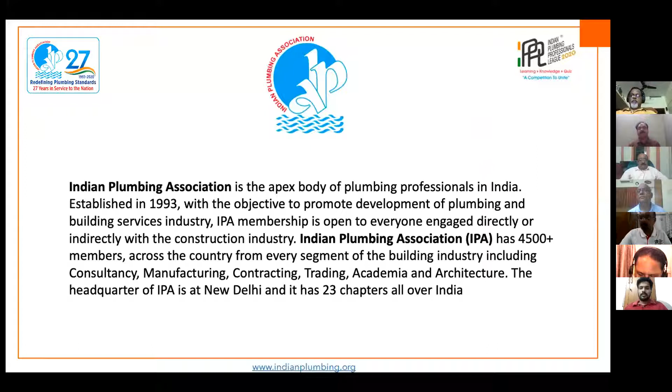The mission of Indian Plumbing Association is the following: redefining plumbing standards in India, striving for an overall improvement of the plumbing profession in India at par with international standards, and active participation with the global body in the plumbing profession.

The objectives of Indian Plumbing Association are to adopt correct professional practices, adhere to ethical codes of conduct, aim for the highest standards of workmanship, promote and foster healthy relationships within the fraternity, and to promote advancement of plumbing services in the country by organizing seminars, exhibitions, and symposiums to educate members of the trade and the general public. This includes providing a platform for dissemination of information and exchange of ideas on matters related to the plumbing profession, establishing harmonious means of communication to facilitate better interface between the plumbing community, government, quasi-government agencies, statutory bodies, NGOs, and private agencies, and establishing training and education programs to create plumbing professionals.

Now I will go on to IPPL, the Indian Plumbing Professionals League. This is a competition organized by Indian Plumbing Association to create awareness on plumbing standards. It was started in 2017, and editions in 2017, 18, and 19 all had classes across the country, but in 2020 the COVID situation forced us to go into a webinar or virtual format.

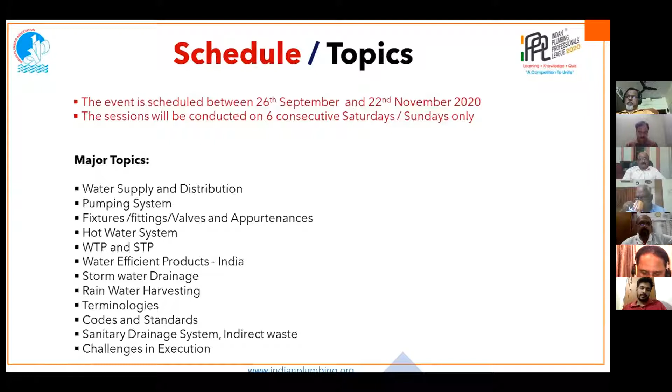The takeaways for participants: once somebody joins IPPL, there are so many takeaways that they get for this 3,500 rupees. That is a complimentary copy of Indian Plumbing Today, which is a monthly magazine of Indian Plumbing Association, and IPA newsletter, then a complimentary soft copy of AGGPP, that is a book, a guide to good plumbing practices.

Then read-only copies of the 2017 Uniform Illustrated Plumbing Code, the 2020 edition of the Uniform Solar Energy, Hydronics and Geothermal Code India, then professional advancement on codal-based plumbing. You also get a professional membership of IPA, which is worth 3,500 rupees. So whatever you spend for this is totally taken care of.

And the rewards, there are so many rewards, starting with the final winner getting a prize of rupees 1,25,000, then 1 lakh for the first runner-up, 75,000 for the second runner-up, and so many other prizes.

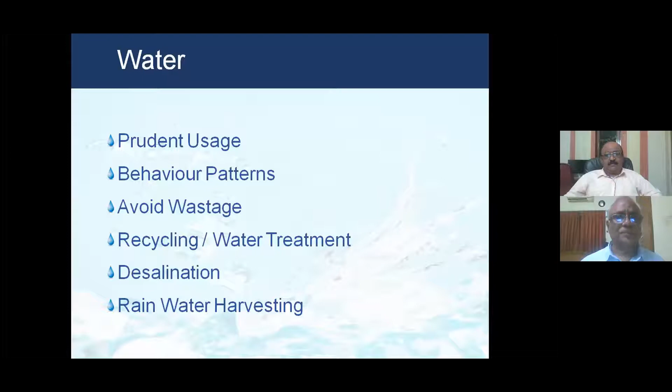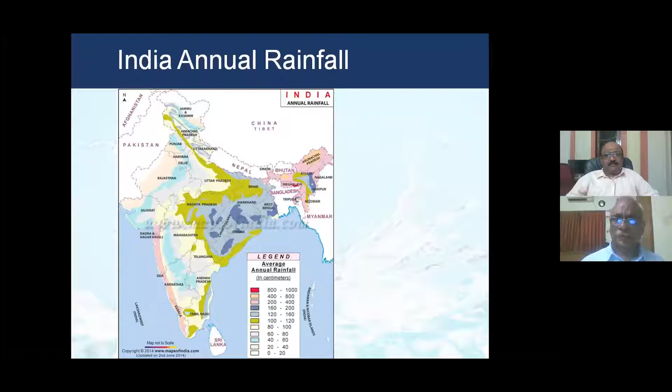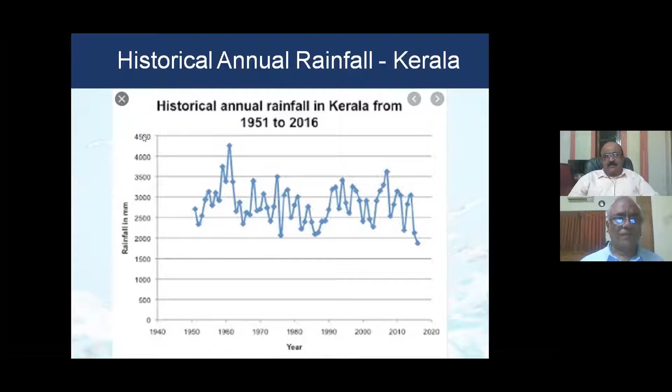As Keralites, we have a responsibility to ensure water for others. Our country receives rainfall around 1 meter annually, and it can vary. By effective use of rainwater and groundwater recharge, we can easily meet our needs, and not only meet our needs, we can be water comfortable also.

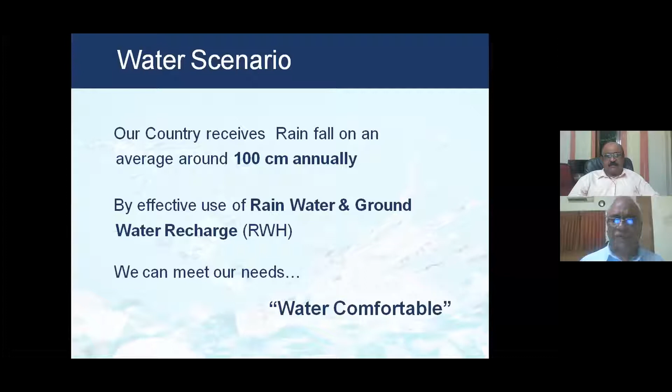How do we use the rainwater? The simplest method is rainwater harvesting. Maximize utilization of rainwater by channelizing it, what we receive in our own plots, maybe into our own sumps, our own wells or to the tube wells. But by these methods, we can only harvest a small percentage of the rainwater.

The main recharge of rainwater should be into the ground by very simple methods. We only allow the rainwater to percolate into the ground. In an empty plot, the rain automatically goes into the ground, but when we construct an apartment or a complex, the water does not go into the ground. So it is our duty to give a channel for the rain to go into the ground and recharge the earth.

What we are driving as a motto, as a mission, is to harvest more than 80% of the rainfall falling in one's plot. Naturally, in every city or town, rain is signified by flooding on the roads. Whenever rain happens, you see there is a traffic jam because the roads become a quarter or half occupied by water. The roads become the drains. We have to avoid this.

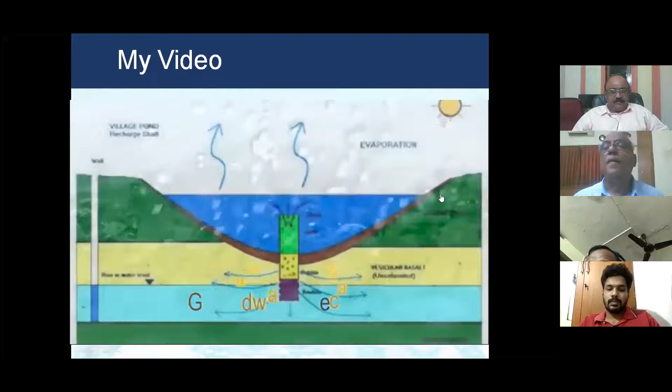I have great pleasure in introducing my friend G. Ram Kumar, who is an M.Tech from IIT Madras. Ram Kumar had a very long innings with Indian Oil Corporation and superannuated as Executive Director. He has high passion towards sustainability and environment and has contributed extensively in the area of groundwater recharge and rainwater harvesting.

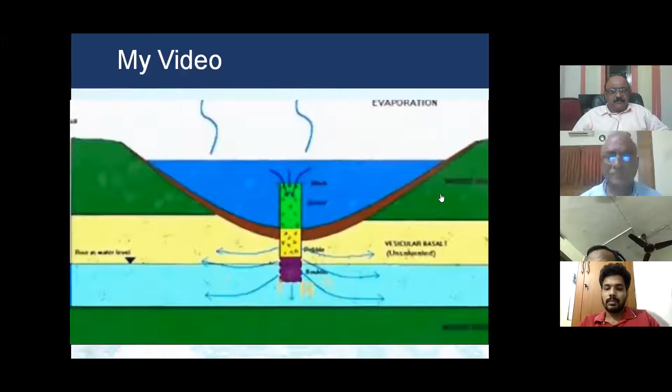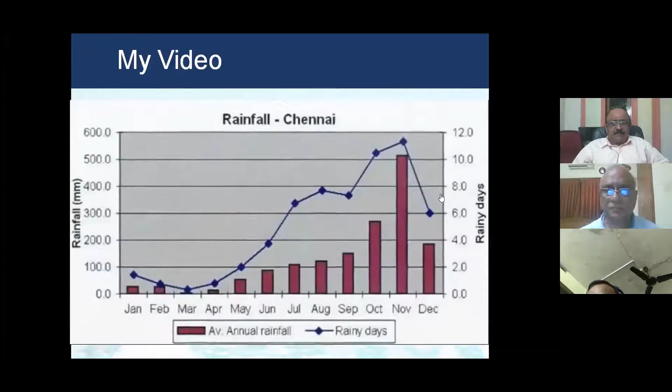Let's take the example of the city of Chennai, where I live now. The city of Chennai experienced the worst water crisis in the summer of 2019. In fact, Chennai receives about 140 centimeters of rain annually, and in case one third of this rainfall is effectively utilized, the Chennaites will have abundant water.

What is rainwater harvesting? Due to the development of towns and cities and paved surfaces, the rainwater does not percolate into the ground, meaning it is unable to recharge the ground. Along with the development of towns and cities, it is our duty to provide adequate measures so that the rainwater recharges the ground.

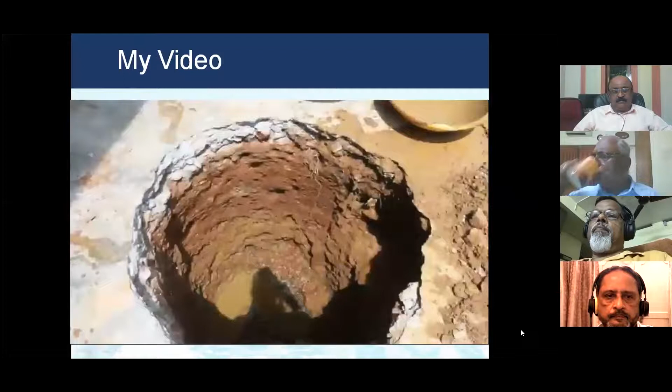How do we achieve this? We can channelize the rainfall falling on the rooftops as well as on the surface of the plots and our own establishments, whether residential or commercial. The rainwater which falls in our own area can be channelized on the ground by provision of appropriate rainwater harvesting pits. Effective utilization of the rainwater by channelizing to the wells or near to the tube wells can add more comfort.

I have been also in touch with our residents and also the agencies in order to propagate the thought on rainwater harvesting and its practical implementation. In fact, the innovative designs which the residents and the people put into practice is itself a great learning exercise.

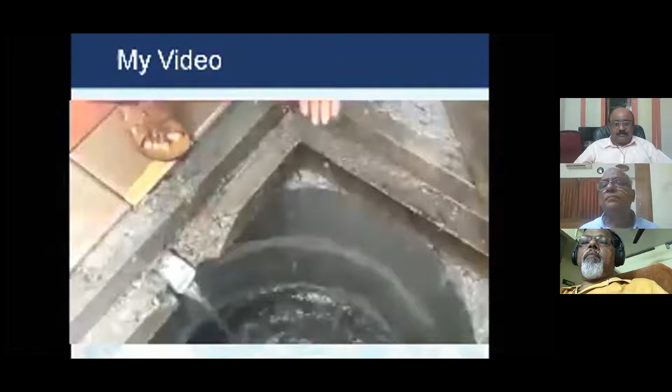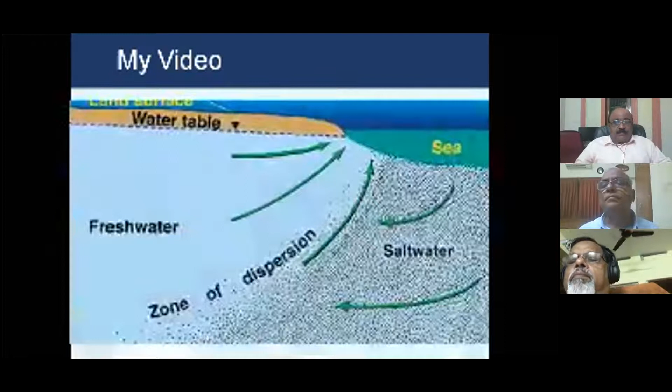By recharging the ground with rainwater, we achieve better water availability or a better water table. In addition, the rainwater, which is the purest form of water available, pushes down the saline water in the soil, thereby reducing the saline water intrusion in the ground strata. In effect, a better water table management.

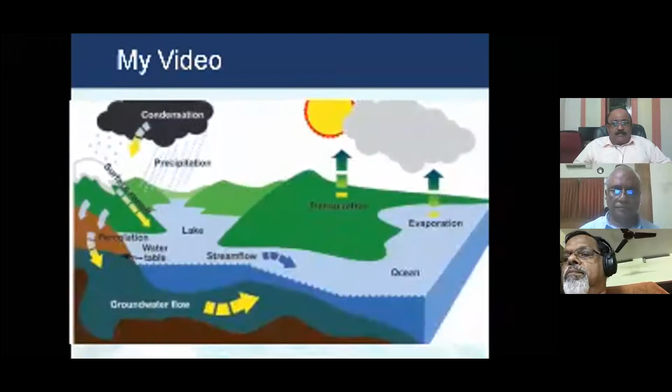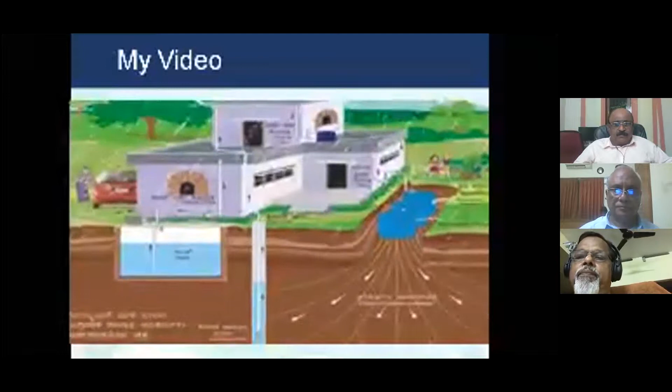The recharge of the rainwater falling in the plots or other paved areas will contribute to a substantial reduction in the waterlogging and drainage problems of various cities and towns. Let us generate this thought process, do practical implementation of water percolation into the ground so that our future generations will have fresh water too.

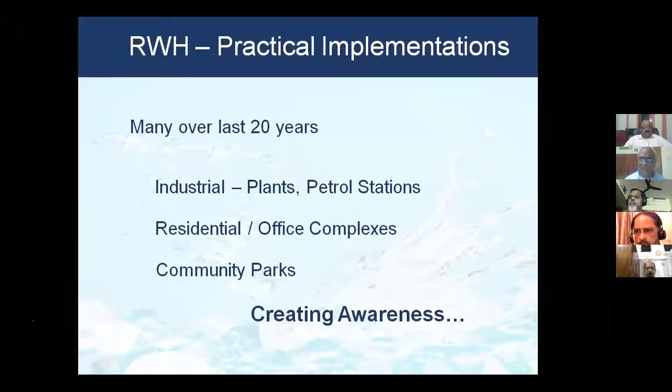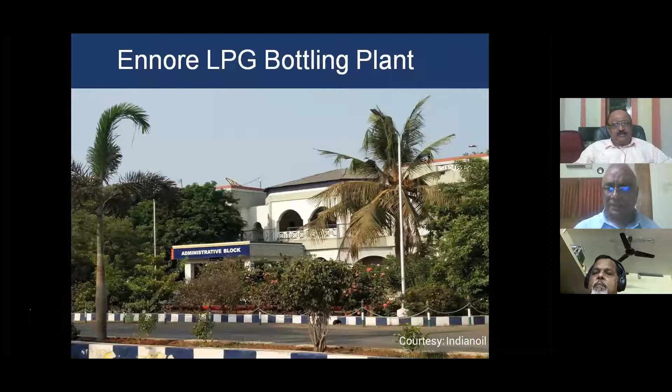This is the beautiful Ennore LPG bottling plant at Chennai, which we commissioned in the year 2000. This plant has recently been accredited with green accreditation by the concerned authorities. When we commissioned this plant 20 years back, we had water at 5 feet, but totally salty water, and not a single drop could be used even for fire protection, let alone for drinking.

So we had an innovative idea to catch the rainwater falling on the plant sheds, construct a tank and use it, and also to percolate the water falling on the 50 acres of land into the ground. These two were implemented, and not a single drop of water goes out of the 50-acre plant even today.

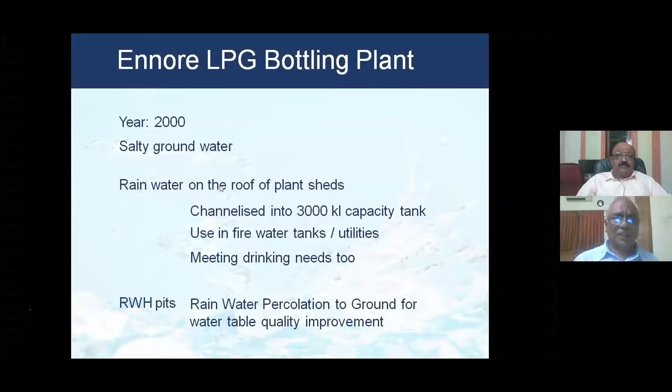The LPG filling shed, where we bottle bulk LPG into the cylinders we get at our houses, has about 7,300 square meter roof. Since about 4,000 square meters is 1 acre, this is about 1.8 acres. Taking an average rainfall of 1.4 meters in Chennai, the water falling is more than 10,000 cubic meters, or 10,000 KL - that is 10,000 into 1,000 liters. A very huge quantity; if we are able to use this water, we will have no issue.

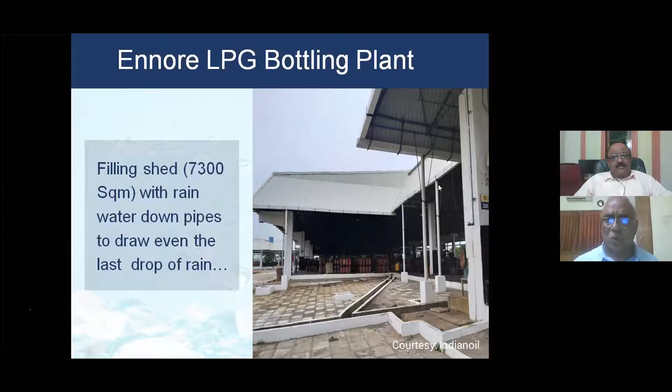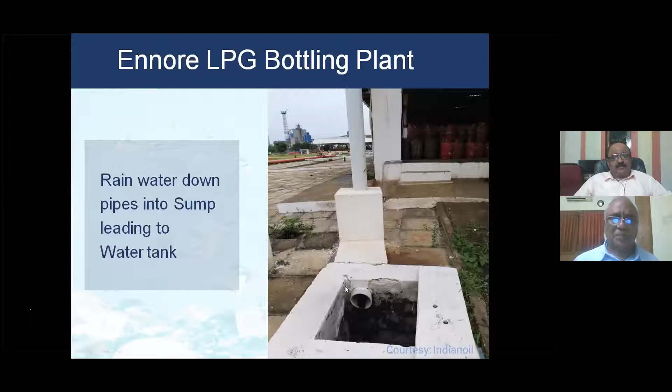So the entire roof water, through about 64 down pipes, was taken down into a small sump, then into a 3,000 KL, that is 3,000 cubic meter tank. This is a photo taken recently, for use in our fire protection tanks as well as for drinking.

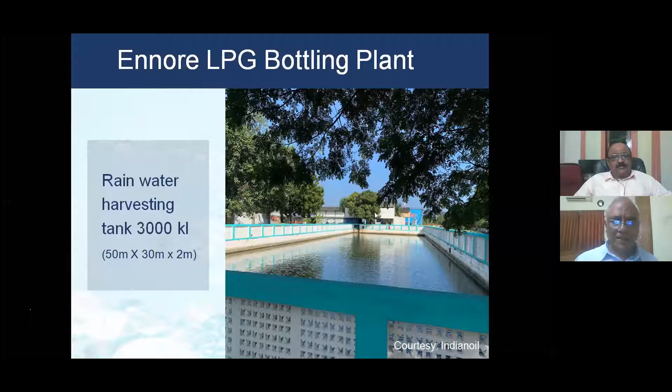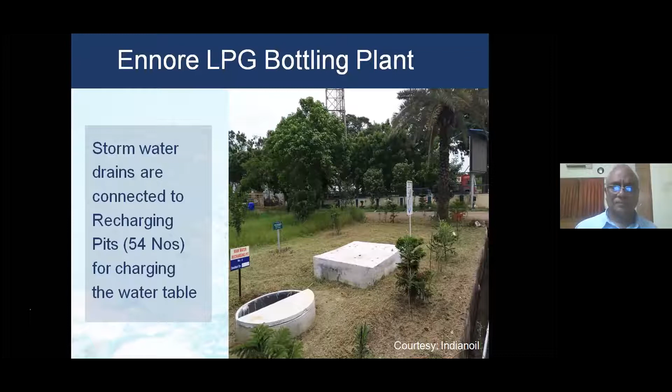Whatever stormwater falls in the 50 acres of the plant is connected through stormwater drains, and since LPG is a totally non-polluting fuel, all this water is used to recharge the ground for better quality water. The quality of groundwater today has improved so much that we are able to use it even for utility purposes. In addition, the solar energy park's water is also taken into a tank for usage. So the Ennore LPG plant is an example of utilizing every single drop of rain falling on the 50 acres, either for use or for groundwater recharge.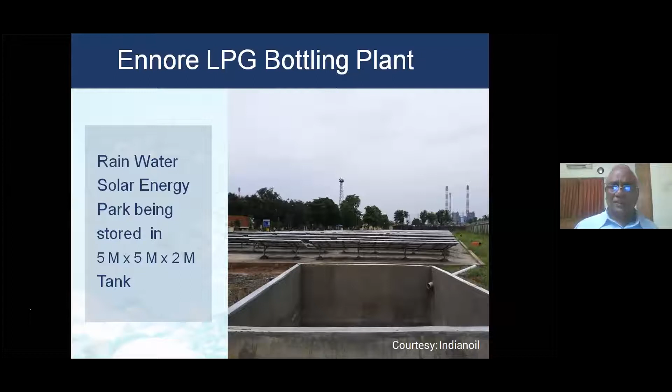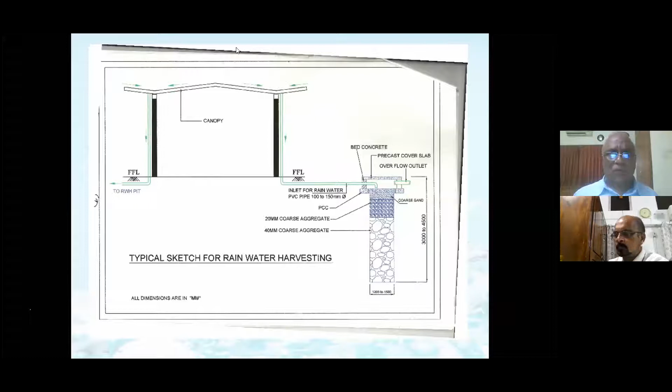This is a general sketch of a petrol station where, from the canopy, using the down water pipe, rainwater is put into a gravel pit for recharging into the ground. There is no ring; the water from the canopy comes in, and there is a small slab.

It gets a very simple arrangement, saves substantial amount of water, and avoids the driveway getting clogged with water. The driveway looks cleaner and the ground gets recharged.

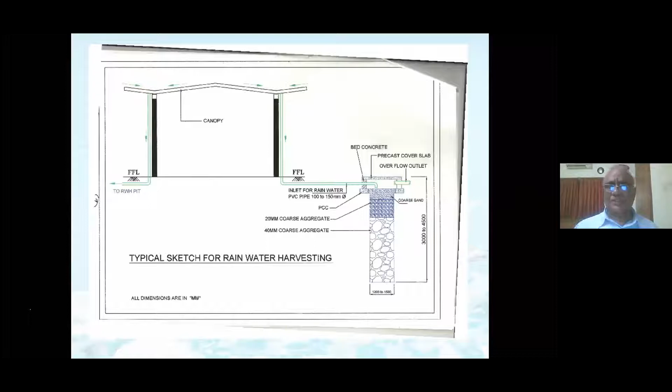Let me take the example of one residential complex, where I am staying now. Near my house in my flat complex in Chennai, we have 8 flats. This is adjacent to the Pallikkaranai marsh. We have got water, right now even at 2 feet, but the quality of the water is very bad.

So when the flat was constructed, I was in touch with the builder. Entire terrace water is going into an open well, and the surface water goes into the garden. We are able to manage whatever water falls on our plot, more than 90%, to be utilized within.

The water in the well was blackish in 2010. Today, we are having water which is equivalent to the tanker water you would buy - a success of the simple rainwater harvesting. The terrace water goes into the well, it does not clog the road, and it saves the trouble of buying tankers. More and more, as the years go by, the water quality is going to improve.

Let me take the example of a community park. This is a park at our Kamakoti Nagar, where we are staying. Kamakoti Nagar may have about 1,500 plots, let us say around 1,000 plots. Here, the water table is available, but the water quality is not good.

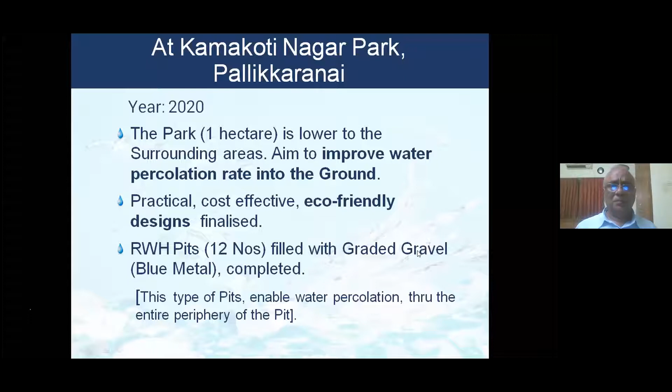Fortunately, L&T wanted to have a scheme done to celebrate World Water Day. So in February this year, I had a meeting with the L&T team and convinced them that this arrangement in the park will contribute to water harvesting, not only for an individual but for the society. We could immediately convince them and take an okay from the corporation, and we could finish the job before the lockdown started.

The various stages I've explained here. We have gone only up to 8 feet because the water table is quite high here - about 4.5 feet diameter at the top. We have dug the pit for 8 feet. You can see the pit at the bottom, and we have filled it up with graded gravel - the gravel at the bottom is of higher size, and as we go up, it is of a lesser size.

We had given one layer of sand also, which need not be required - it is a question of design, we can vary it. At the top, only at the top, a small ring to designate that there is a water harvesting pit involved. At the same time, the percolation is directly from the pit into the ground, and the water flows into the ground.

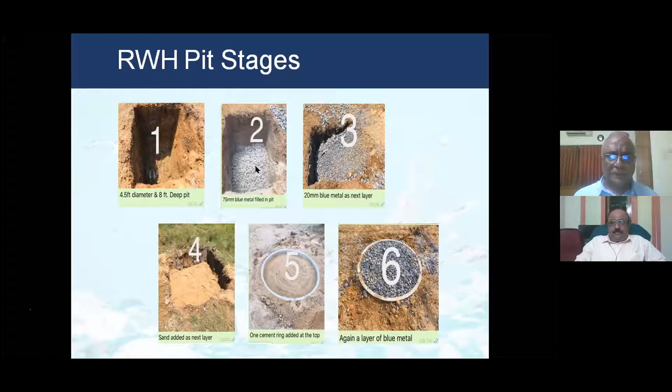The principle is: allow water to percolate, break the clay layer at the top, allow water to percolate by the simplest of designs - very simple, cost effective, and no accidents will take place, and the park's ecosystem is maintained. In fact, such systems - what I heard in Trivandrum also, the Putharikandam Maidanam, I think, is inundated with water - and the government is planning to construct some ponds to take the water.

In fact, in case we have multiple simple harvesting pits, they will be able to draw the water at a faster rate. Maybe we can have a pond also for beautification and taking some water. Maybe we can propagate these thoughts either through the paper media or to the government - that simple designs are available which do not spoil the usage of that plot, while at the same time the area becomes cleaner and the groundwater gets recharged.

These systems can be tried out. As an allied group of the CETA and the Plumbing Association, I think we can generate this - we can use the media, maybe the paper, maybe the TV, and build awareness. So these simple designs can go a long way in solving the waterlogging issues and also charging the ground.

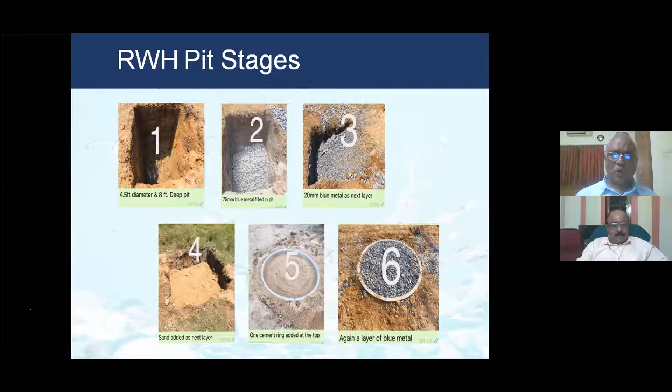The work on the park is in progress. We were able to finish the work in 2 days. The JCBs came and dug the pits, and this is a completed pit. In fact, nobody will know there is a harvesting pit also.

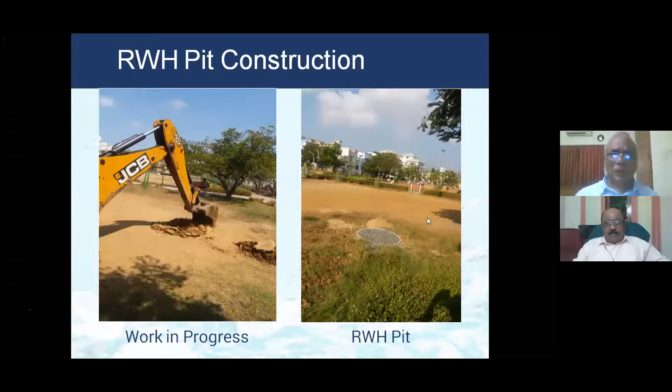During the recent rains, Chennai had some reasonable rains, and it was already observed that the water percolation into the ground has improved a lot. In fact, this is a project which has contributed to social awareness with impact.

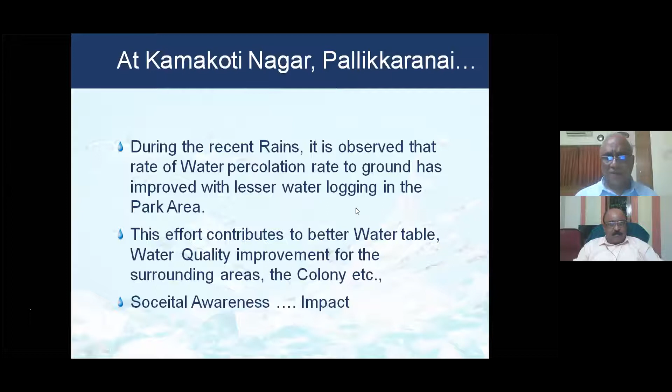I'm coming to one of the most important activities where our CTAC Chennai, that is the CETA alumni group of Chennai, is involved. The Pallikaranai Marsh is one of the wetlands, and it is a boon for Chennai that this sort of wetland is existing in the city of Chennai.

It is a large area, about 700 hectares. In fact, originally, what I understand, so many centuries back, it was 7,000 hectares. Now it has shrunk to 700 hectares.

Our CTAC team is working on the conservation of this marsh so that it does not further shrink, so that the marsh does not get occupied further. The dumping of waste into the marsh is stopped. The CTAC group is working by way of awareness in close coordination with the Forest Department of Chennai.

So through the medium of radio, through Facebook, you can all log in and offer your support. This project is not a small project, it is going to take time. But why is this project worth it?

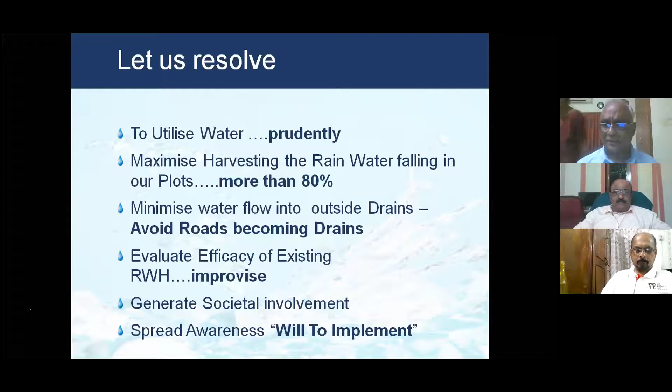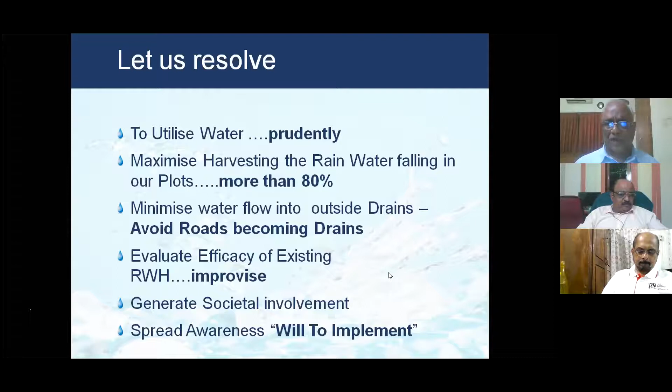I shall do it, we shall do it, and we have done it. The will to implement and go forward is the most important message which I would like to communicate to all of us. As a body who is God blessed, it is important for all of us to spread the awareness of the will to implement, and make sure that it is implemented, and implemented well.

A will to ensure water comfort for the future generations to come. With prayers to God, let me end this presentation and look forward to your wonderful cooperation. I'll be glad to clarify any doubts as I can, and use this body of allied people to clarify my doubts, interactions, and go forward. Thank you.

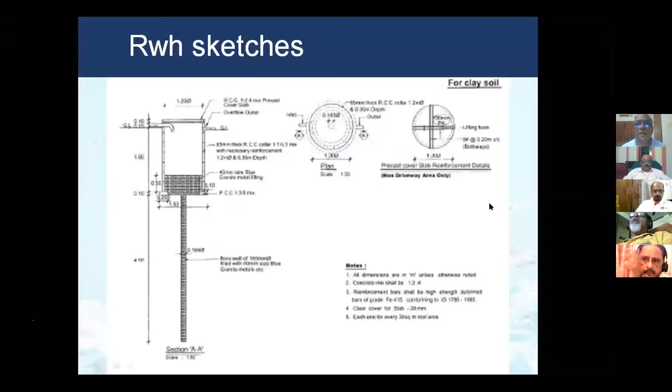If there are more questions, people can type in now. If they want, they can ask also, no problem. They can, because they don't have that facility available. They have to come in the chat platform. Only through chat, because audio is muted for them, you know. But I think in case somebody raises a hand, we can. Yeah, that's true, we can give them. I saw many people raise a hand. There is the chat and there is the question and answer tab, both are there.